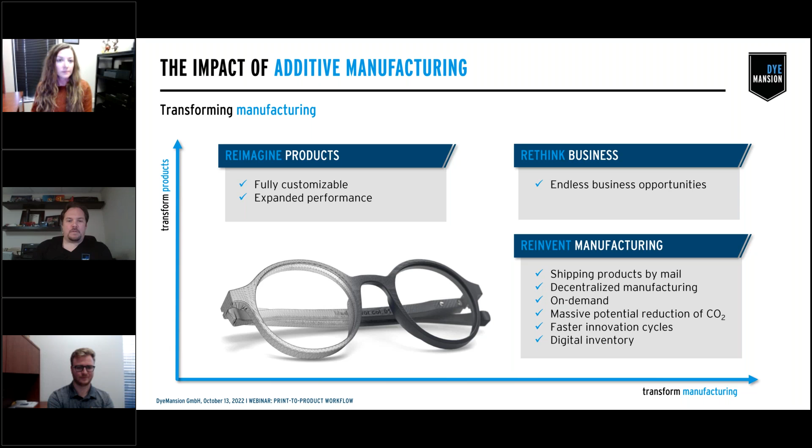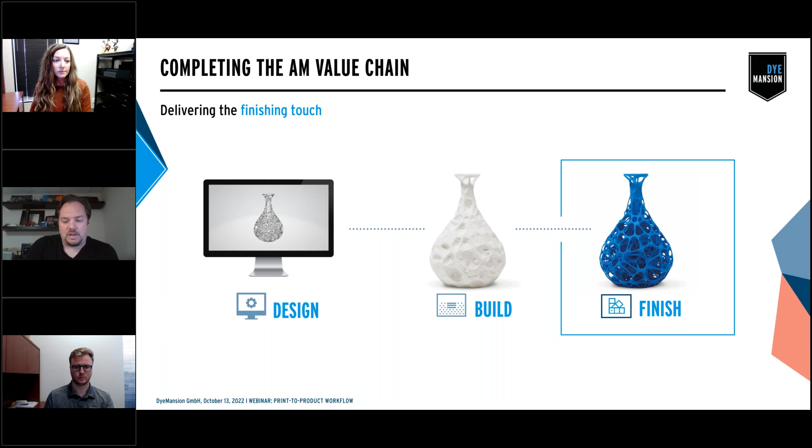The rest of this presentation will look as follows. I'll go into some details as to who we are at DyeMansion, the print-to-product workflow platform, as we call it, and I'll take a deep dive into our technology segments as well.

At DyeMansion, it's our mission to continue to be the global leader in post-processing solutions for polymer 3D printing by turning raw parts into high-value products.

DyeMansion was founded in 2015, headquartered in Munich, Germany. Our North American team operates out of Austin, Texas, and globally to date, we're right around 100 or so people, and we have about 700 systems or more installed worldwide.

It's our vision to make 3D printed products part of our everyday lives, enabling tailored solutions and driving towards sustainable manufacturing. This is all achieved primarily with the people in our company and the great technologies we have produced. We then fortify this with our great partner network of OEM 3D printing companies and great resellers like AdvancedTek.

As showcased here, today we are the only provider of a full workflow that offers an end-to-end solution for advanced finishing. This includes cleaning, surfacing, and coloring. Again, it's the technology and our methodology that allows us to bring high value to the raw 3D printed part.

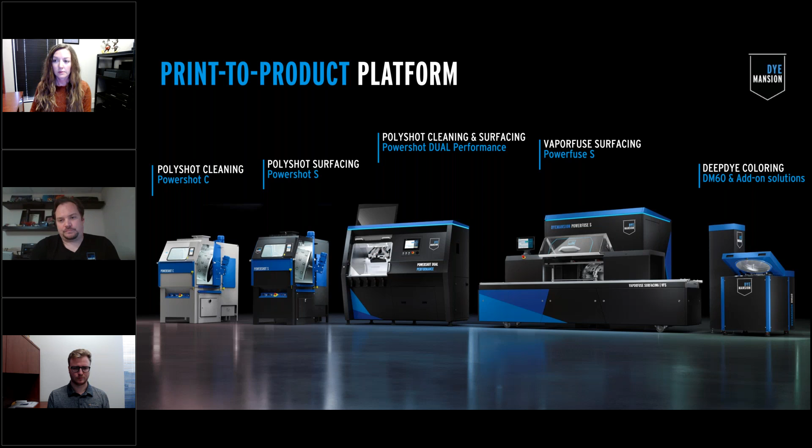When looking at the benefits of our print-to-product workflow, you'll see it delivers high-quality parts from a technology infrastructure that is not only versatile, but automated and scalable with readiness to support Industry 4.0. We've already found proven success within various industries that is largely due to our agnostic approach to materials and geometry, with a focus on building robust systems that achieve reproducible results, which further provides a cost value to our customers.

The DyeMansion technologies are quite versatile when it comes to supporting printing technologies in the wide range of materials in the market. With that, we primarily focus on the polymer powder bed technologies like SLS, MJF, and SAF, where we can process the many flavors of nylon 12, nylon 11, and TPU materials. We've been expanding our smoothing capabilities into the filament space with advanced materials like Ultem, ABS, and nylon. We even have limited dye capability with the EPU resins from Carbon.

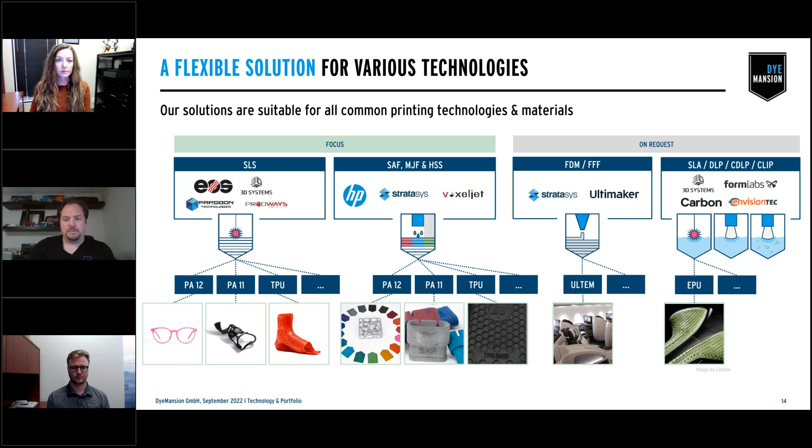What you see here is kind of how that print-to-product workflow can be applied to a printing technology segment. So again, beginning with that digital phase where they're using advanced surfacing technologies like nTopology, along with 3D designs like GrabCAD. Once you have your digital component, you send it to a printer like that of the Stratasys H350, their new SAF technology. Once the parts have completed building, you'll do a light decaking or depowdering of the part.

So you're just getting that bulk material off, and then you'll put that part with still powder on it inside of our PolyShot Cleaning system, also known as the PSC. From there, it'll run an automated process of about 10 minutes where the parts are tumbled in a rotating basket or drum, and a cycle of compressed air and blasting media is applied to the parts.

Once it's done, it's what we call a clean, raw, as-printed part. From there, depending on what kind of surface finish you're looking for, if you're looking for something closer to the raw part where it's still granular, and not a completely smooth or high gloss part, you'll want to take this top line where you'll actually apply color first, and then you'll run it through our PowerShot S Surfacing system, which uses a different media than we offer in our cleaning system, and provides a more homogeneous surface finish that locks in the color and has this satin type sheen to the final surface.

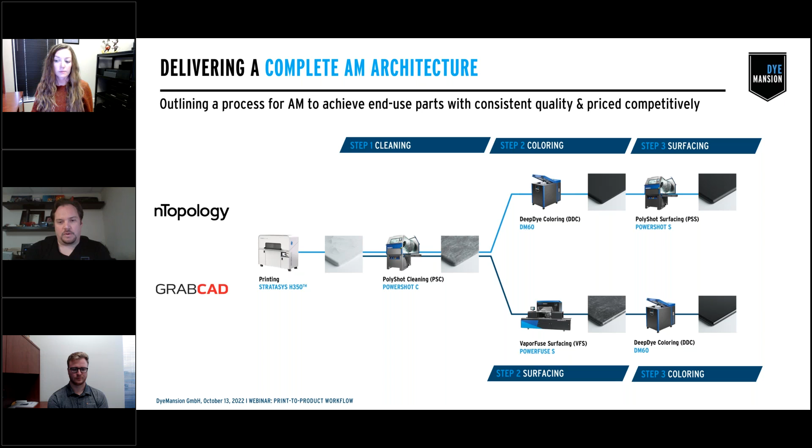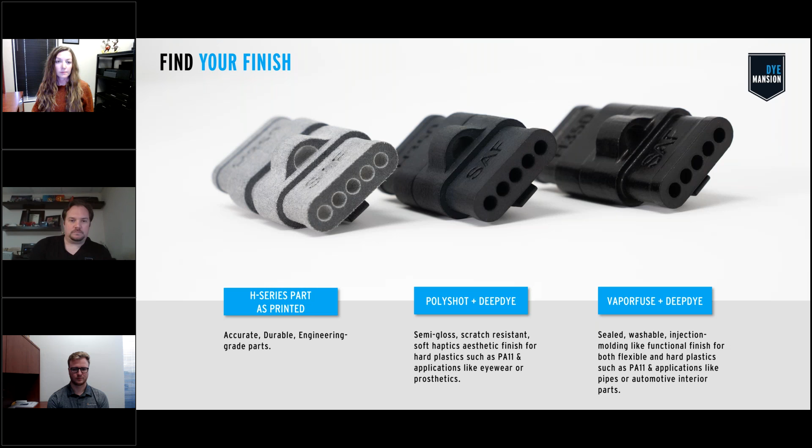So let's take a deeper dive into our actual technology systems, and we'll begin with the PolyShot cleaning, PowerShot C.

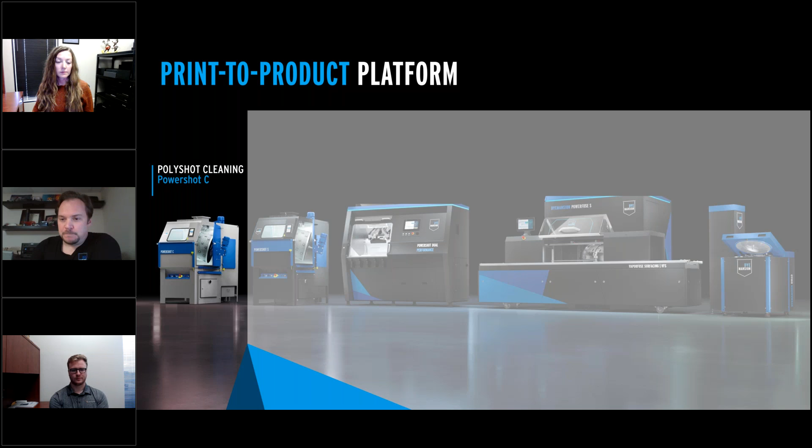The first thing to consider here are the risks of what we call manual cleaning. These are your standard bead blasting cabinets, very low cost. They're often the standard issue that a 3D printing supplier will provide. They work, but they have many flaws. Largely, you're dealing with parts in one hand and a compressor blasting gun in the other.

What we find are typically these issues: fingerprinting, just from holding the parts and not having consistent pressure, so you get this little shadowing effect. Powder residues, possibly from insufficient maintenance on the machine, to where the media is just not being as effective as it can be. And then we see these burn marks, from overpressurization or over-cleaning of the part.

On raw parts, sometimes they're hard to see, but when we look at the steps down the line with post-processing, particularly dyeing, these shadowing effects, or poor cleaning results, will show through as defects down the line, particularly in systems like dyeing.

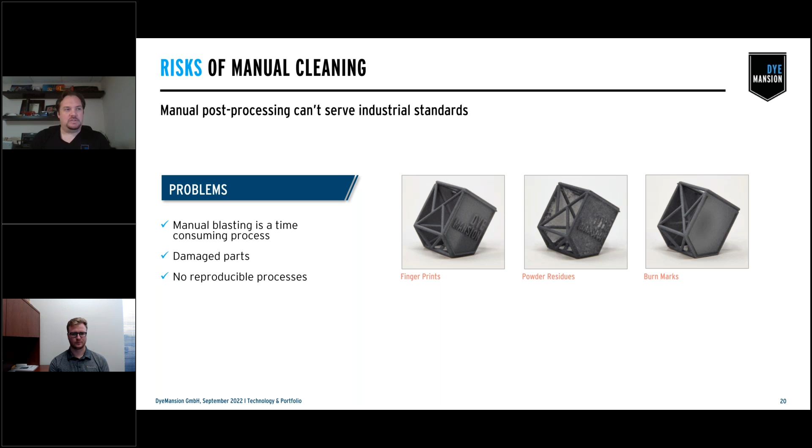So our solution is the PowerShot C. It's becoming the industry standard for easy and efficient part cleaning. It's an automated process. Once you load the parts, you close the door, select your cleaning program, which can be anywhere from 3 minutes to 10 minutes typical, but you can also create custom programs up to 15 and 20 minutes.

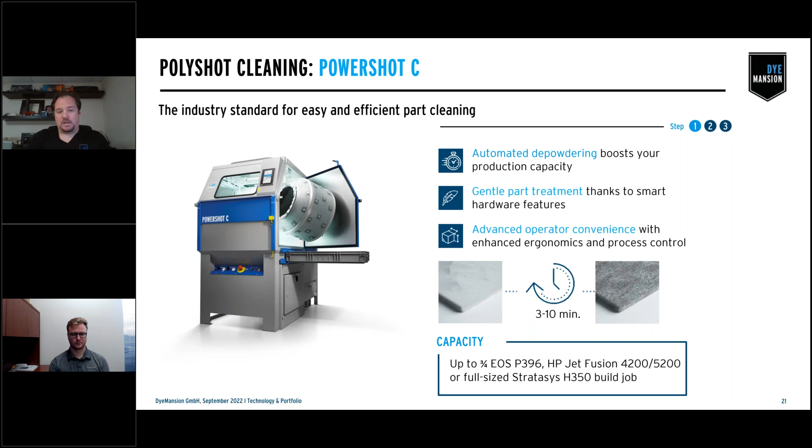It's going to run back and forth between media being blasted and compressed air to always keep that part clean and allow the media to be effective on it. As you can see at the bottom, the system has the capability to support a typical build size, about three-quarters of a full build from a P396 system or an HP 5200 system, or it can take a full-sized H350 build volume.

A little bit more of a rendering of what's going on inside the system here. You see we start with a part lightly covered in powder, and then the media is applied, breaking it down. On a microscopic level, just like with a standard cleaning process, you're still left with what we call a microfilm of partially sintered powder.

This is really where the moisture absorption and dirt and dust collection happens on an as-printed clean part. This microfilm of powder is easily impressionable and is just there to absorb anything that comes in contact with it. And then you're left with what everyone interprets as a raw printed part.

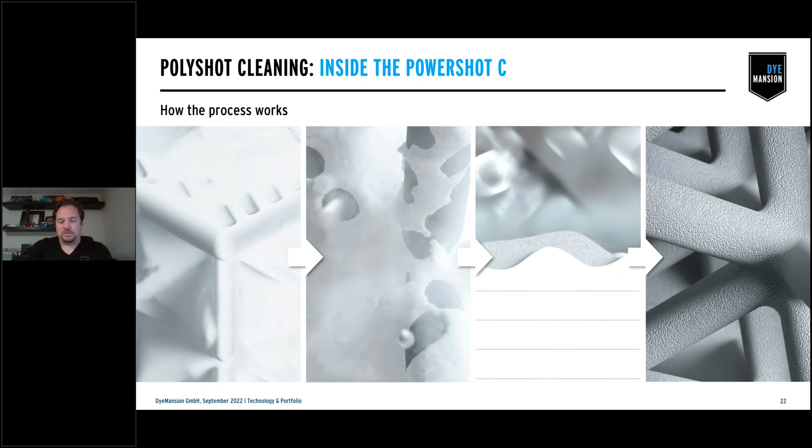Looking at the value and space savings that the system has, one PowerShot system can replace the need of 4 manual systems. It will also support typically about 3 to 4 printing systems as well. Generally, you just need one operator to maintain and support the operation of a PowerShot system.

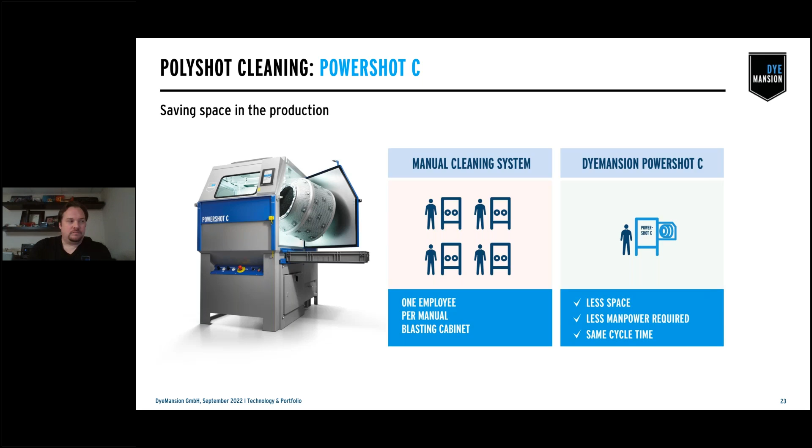Now the very similar but different PolyShot surfacing, PowerShot S platform. As you see, it's a very similar looking system, built off the PowerShot C architecture. The big difference here is the media and blasting strategies that we apply. We use a different media in terms of the actual material, as well as particle size. But it offers all the same advantages in terms of automated operation, defined programs from 5 to 15 minutes, as well as the ability to create custom programs, and it has the same capacity capabilities as the PowerShot C.

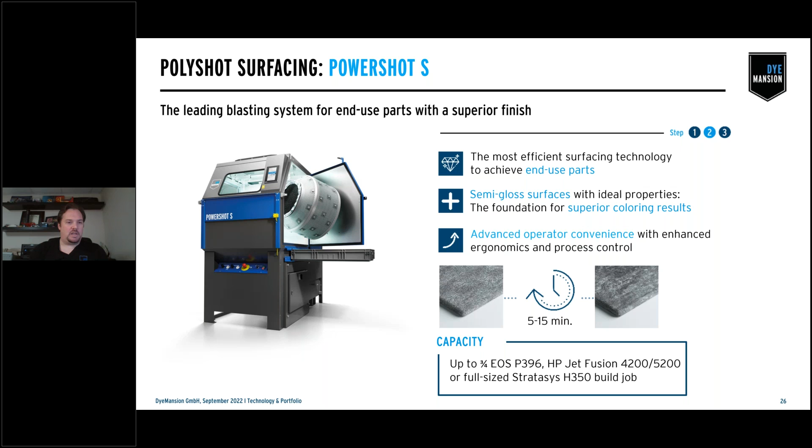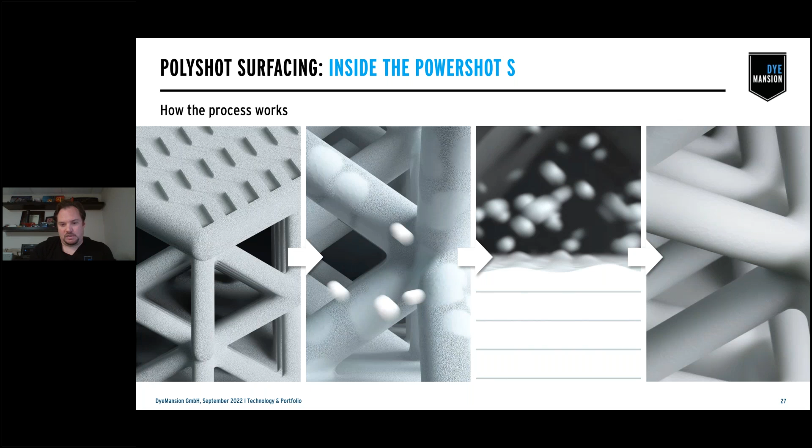So what this is really doing is once your parts have been cleaned, and run through a system like the PowerShot C, you see with that microscopic layer view that the microfilm of powder has been removed and or compacted further into the surface. So you get a cleaner, more scratch resistant, and even partially sealed surface finish that's more homogeneous and aesthetically pleasing to the human eye.

Looking at different stages and materials, with a white base material you go from the high granularity of the raw part to slightly smoother with the PolyShot S, and then the shine and finish really comes through once color has been applied. Same thing on the bottom with gray parts - you'll see the part get a little darker after the PowerShot S phase, because it's taking away that raw white material on the surface.

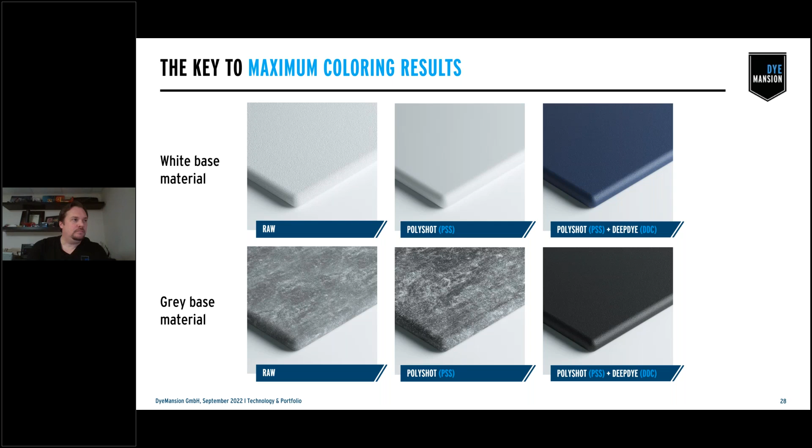These are some application highlights worth noting - automotive, consumer parts, industrial components, consumer products, and prosthetics. All of these had digital surfacing applied, nice pop colors, custom colors for flesh tone matching. You can see that all these products, while 3D printed, very much look like the industrial injection molded components they'd be mimicking otherwise.

This is what makes it the leading blasting system for end-use parts to achieve a superior finish. It's one of the most cost-effective solutions to achieving a high-performance finish as well. So this is just further examples of that capability.

Further in the PowerShot series of machines, we have our new line brought to market this year, with machines starting to deliver in this Q4 segment - this new performance series. It's available as an independent cleaning system and an independent surfacing system, but we now offer a new dual system that has the ability to do cleaning and surfacing in the same system.

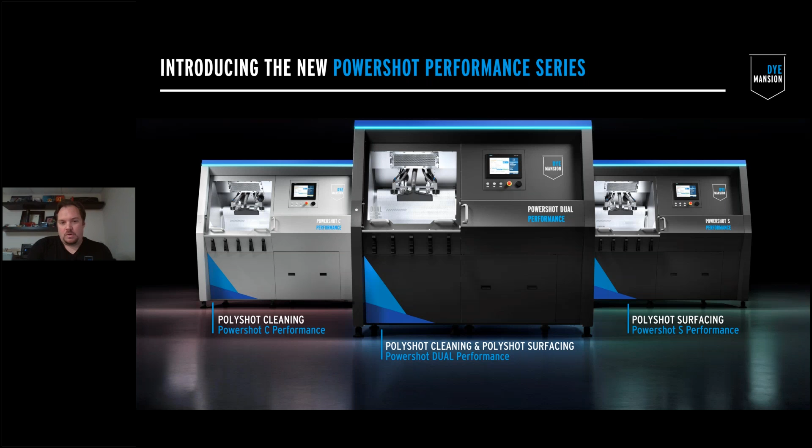One of the big process improvements to the PowerShot technology is this change to what we're calling the multi-belt. This is a much more versatile processing chamber - much larger and more accommodating to a wider range of geometry, including small parts, large parts, and fragile parts. You can see, just on size alone, how much bigger it is compared to the processing capabilities of the established printing systems I've mentioned before.

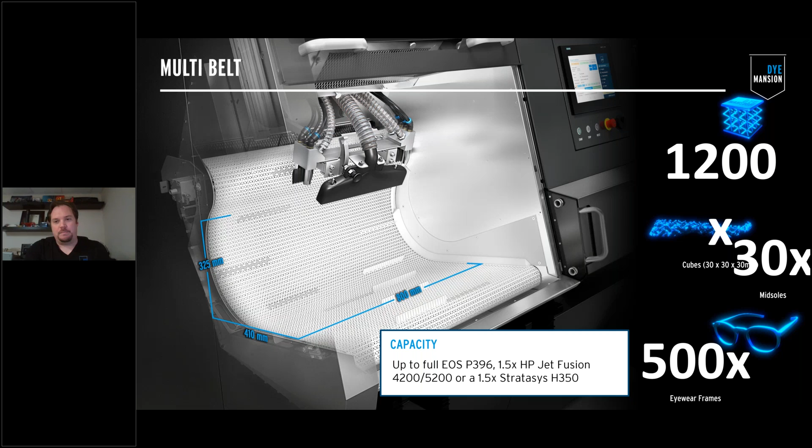Space saving wise, if you're looking at the dual performance system to replace buying two individual machines, you can see it roughly saves about 50% of the workspace compared to the footprint required for a PowerShot C or S system individually.

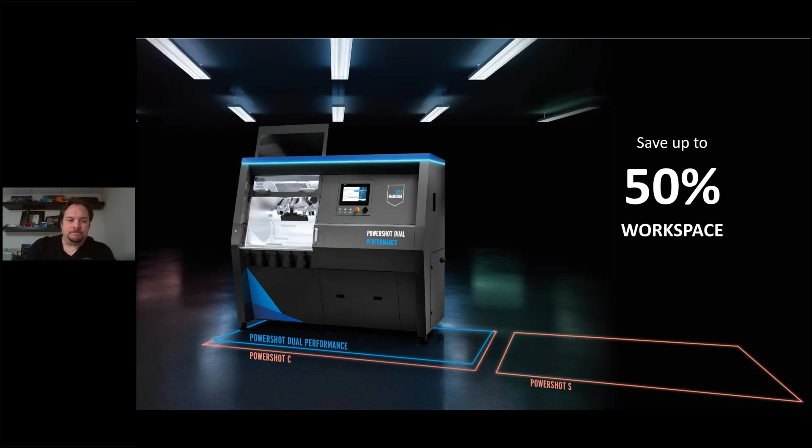Overall, this system was built further towards Industry 4.0 and the Factory of the Future. It has a similar but more advanced graphic user interface, and with the way the multi-belt functions, it can also assist in automatic unloading of processed parts.

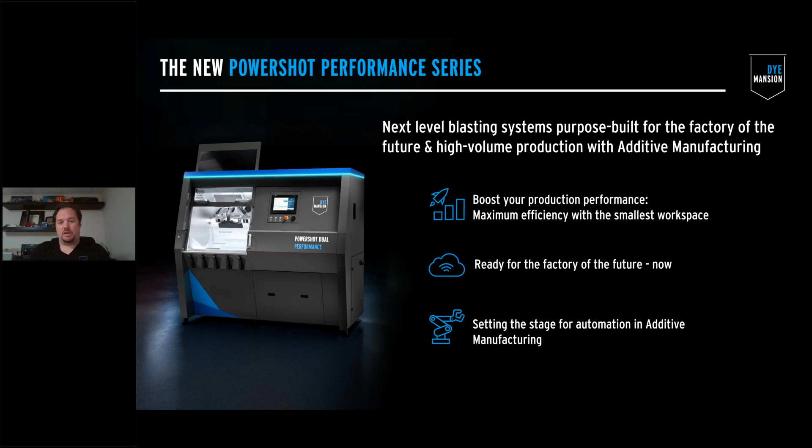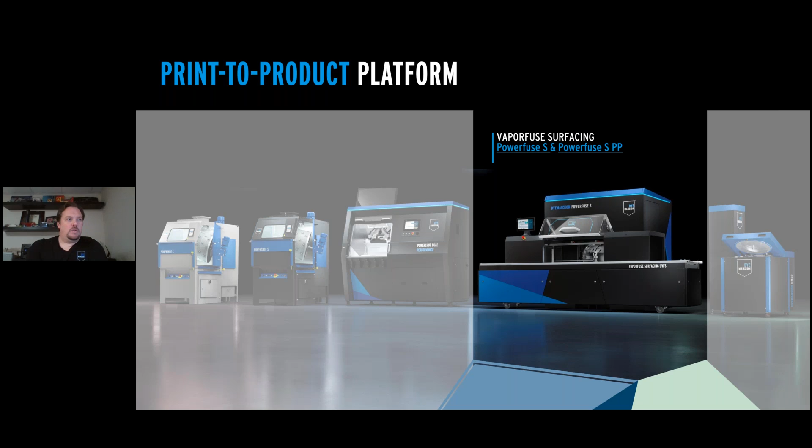Now let's look at our VaporFuse system, our smoothing technology, which we offer in two series. Newly announced last year at Formnext and coming to market through 2023 in delivery terms, we have the PowerFuse S, the system we've had available since 2019, which is our standard and most versatile system. It was developed for processing PA12s, PA11s, TPUs, and filament materials - one solvent system that treats all of these materials. Then we have the PowerFuse S PP for polypropylene, a specific system for processing polypropylene materials only. We will further develop this system to see if other material applications exist with the special solvent, but for now we're launching it as a PP exclusive system.

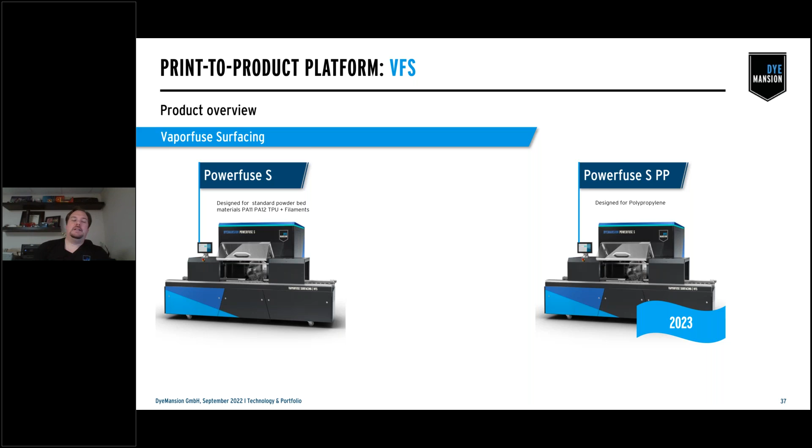The main attributes we offer with the PowerFuse S, beyond its capability, is that it's a green technology - a single solvent, and it's a green solvent as well. It's a closed loop system, so the solvent isn't a consumable that the end consumer needs to store or handle directly - easy to handle, with no concerns about needing PPE in the operation environment. Ultimately, it delivers sealed and smooth surfaces, which benefits air tightness, bacterial protection, and some part strength.

It's eco-friendly, it's a non-CMR solvent, and if you're using the right printed materials, it's approved for food contact. With the automatic loading feature, it can run 24/7, giving you automatic loading and unloading capability for lights-out operation. Typical process time is anywhere from 90 to 180 minutes, largely depending on material limits and the surfacing levels you're trying to achieve.

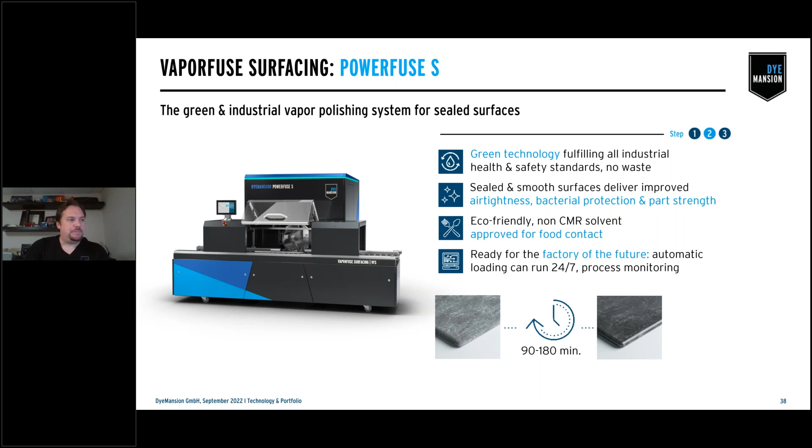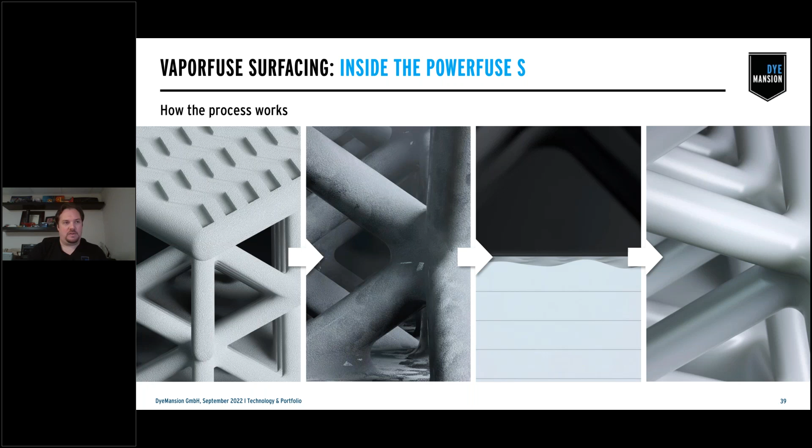Inside the system, you have your clean parts. The solvent is introduced as a vapor. It condensates and settles on the surface of the material, opens up and relaxes the material surface, and as it finishes processing, you're left with a nice, smooth, sealed surface.

Another unique capability of the DyeMansion technology with the PowerFuse is our ability to have iterative smoothing levels. Out of the gate, we offer three levels of smoothing: light, balanced, and strong. These smoothing levels can be fine-tuned by the customer, so if light is too light and balanced is too strong, they can create a custom program to find that sweet spot in the middle.

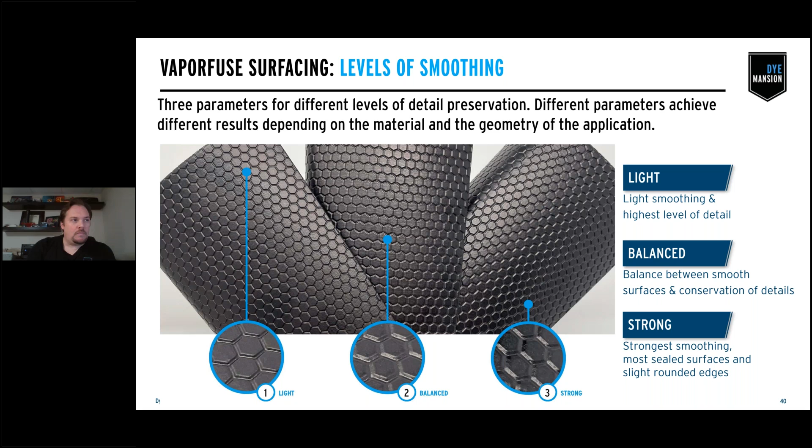Just to show you more graphically here, there is a difference between the levels we try to achieve. You can see there's a significant reduction in surface roughness going from raw to light to balanced to strong.

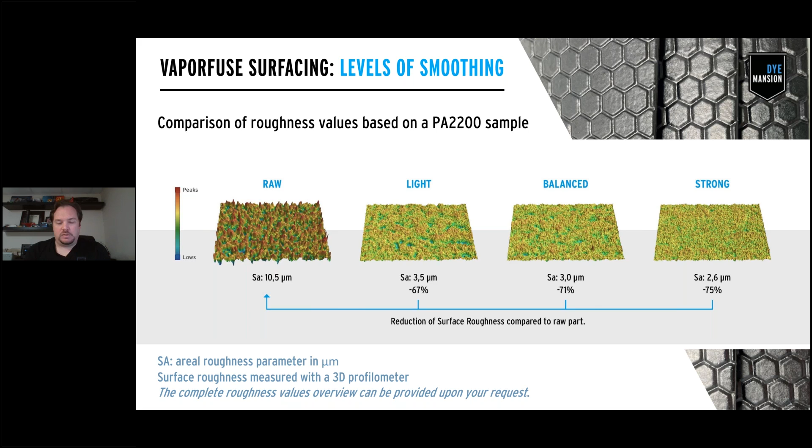TPU materials typically continue to de-powder after they've been printed, so smoothing TPU materials is a great way to maintain their mechanical characteristics as well as improve their tear strength.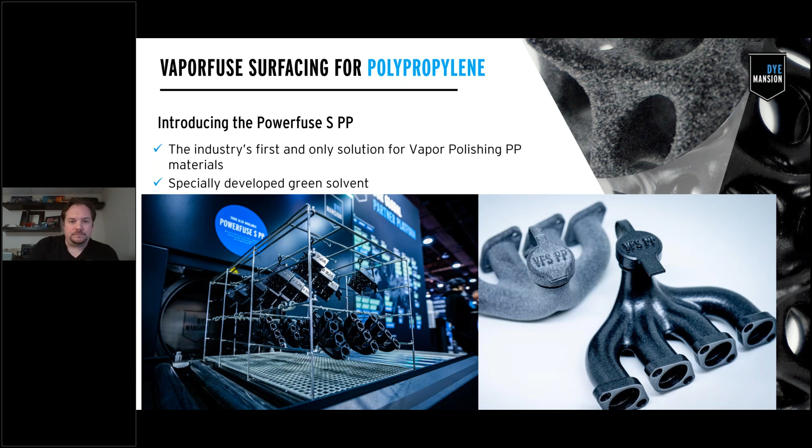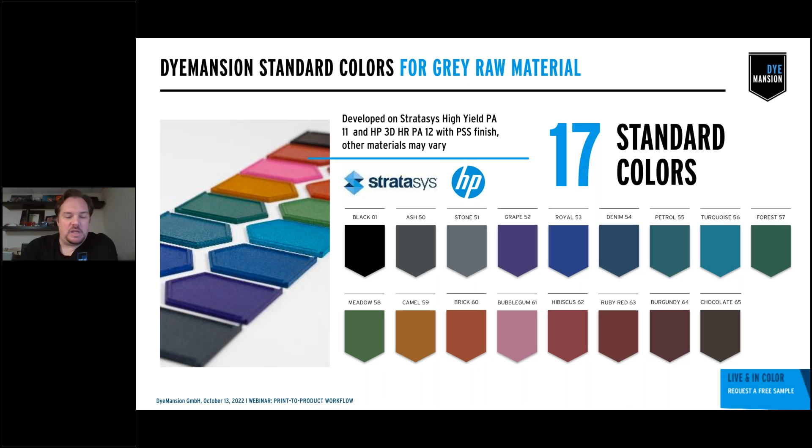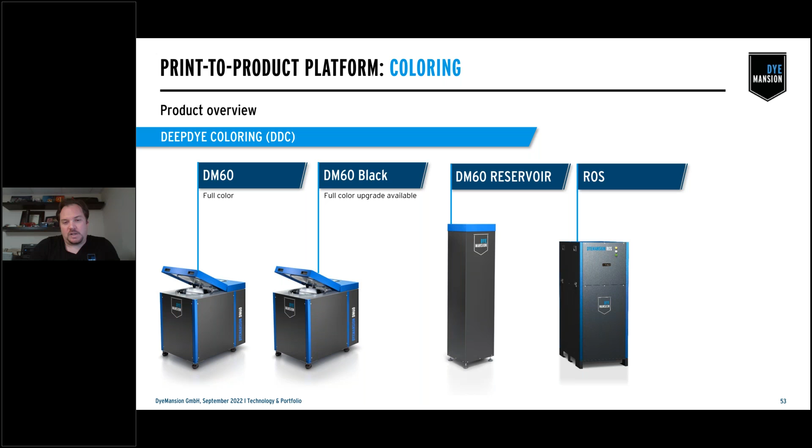So the DM60 offers this wide range of color options across all of our material capabilities, from white-based parts to gray-based parts, as well as PA12, PA11, and TPU materials. These are exact formulas that we produce, meaning they're reproducible and offer traceability for the process—important if you're implementing multiple machines across multiple factories. Our colors and their production are all ISO certified. Typical runtime is about 2.5 hours, and much like the PowerShot, we can support about three-quarters of a build volume for the EOS P396, or up to a full-size build volume for the H350 from Stratasys.

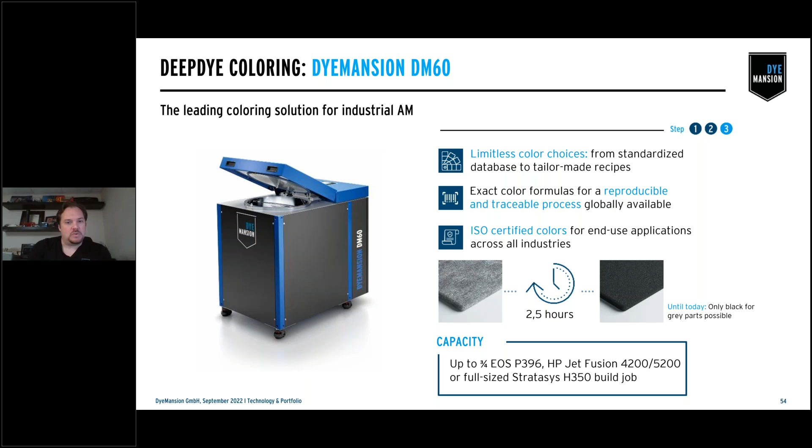Inside the system, parts are introduced to a water bath where the dye is mixed, chemically bonding to the material. You can see this penetrative effect, depending on material thickness, chemistry, and process time. You'll see anywhere from 100 to 300 microns of color penetration depth, which means it's much more scratch resistant than other coloring methods out there.

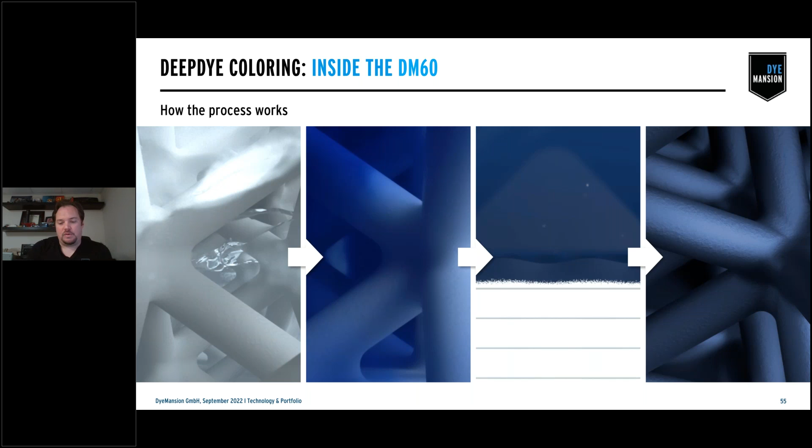Speaking of other coloring methods, we're often compared to pot dyeing technologies. So what are some advantages of our system? It's much easier to operate, as simple as loading up parts, kind of like the interaction at a self-checkout at a grocery store. You scan the cartridge, it recognizes the processing recipe, sets all the parameters, you hit the function to lock the door. Once locked, it runs an automated process that includes cleaning, which is a big advantage versus pot dyeing, where systems are very manual and often require manual cleaning maintenance, whereas ours is automatic with a cleaning agent.

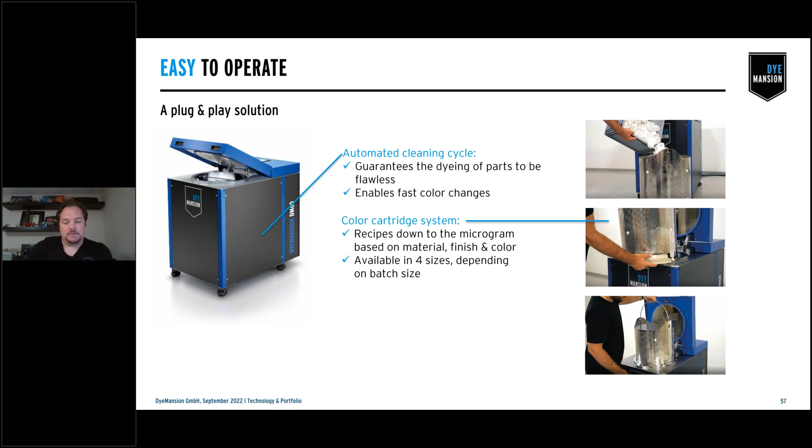More about the color and cartridge system and the reproducibility and traceability we maintain. Each cartridge is specially developed and mixed, with an RFID tag containing part specifications factoring in geometry, build process, materials, and the finished surface you're looking to achieve—whether a PolyShot surface, a vapor smoothed surface, or tumbled from an outside provider. We take all these factors into consideration when developing colors for our customers, and that's all baked into the RFID tag, ensuring reproducible results when building at scale and volume.

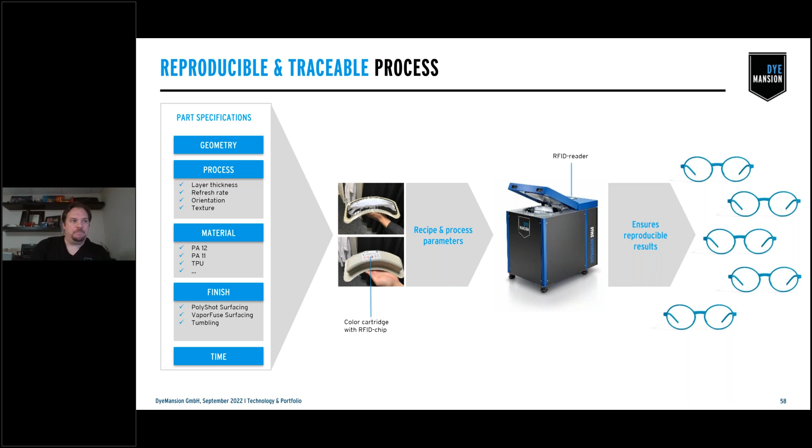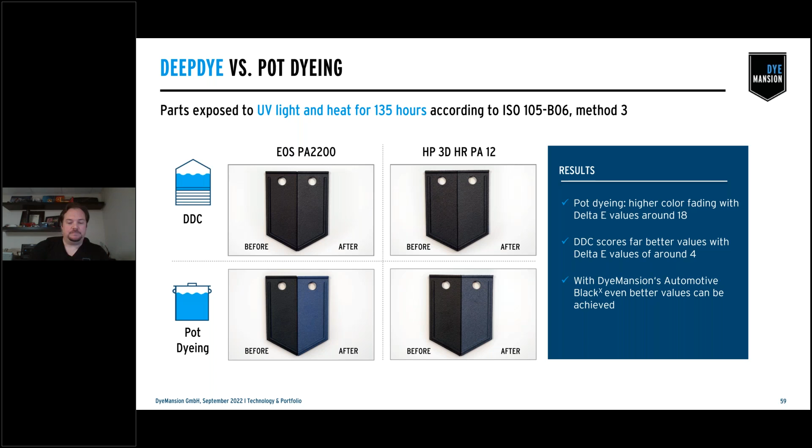A big comparative advantage is our color robustness. When exposed to UV light and temperature environments, we're able to maintain color vibrancy much better and longer than a traditional pot dye system. Unlike something from a box at a hobby or fabric store, or made for textiles, these are specially developed color formulas. Our production method is ISO certified, and we test against various ISO levels and industry standards related to biocompatibility, color fastness, scratch resistance, and light and heat resistance. All this documentation can be provided to customers upon request.

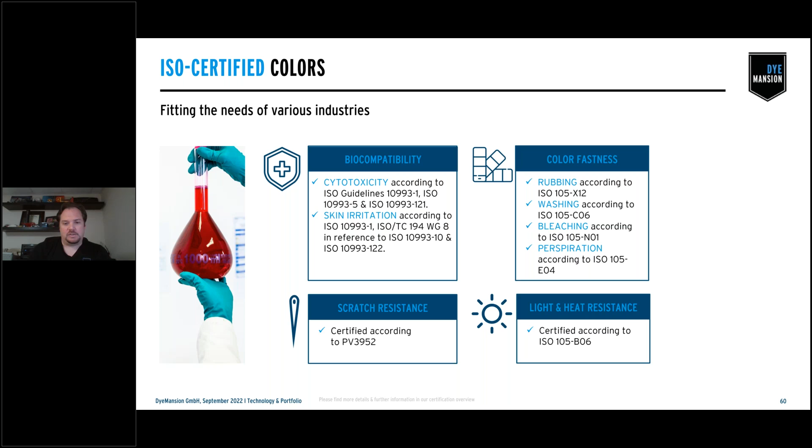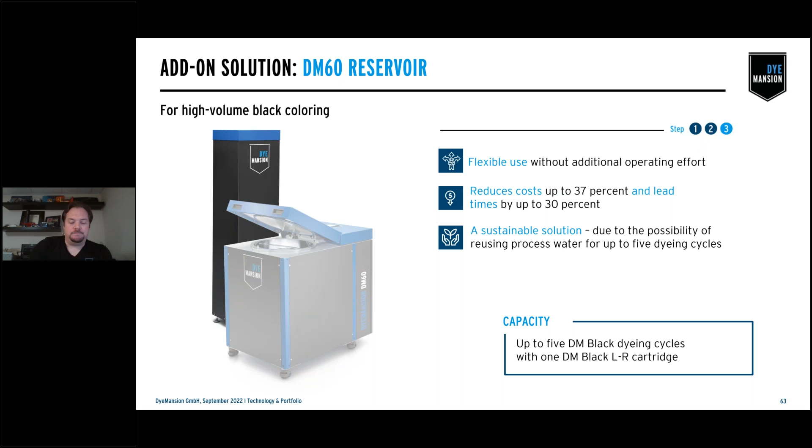That concludes our deep dive into the technology. To summarize as I close out, additional services we provide to our customers include my role—application consulting—where we do knowledge transfer and training on the technology, advanced training to further enable our customers, as well as traditional service and technology enablement, making sure to help customers with on-site and remote support to troubleshoot any issues they may be having.

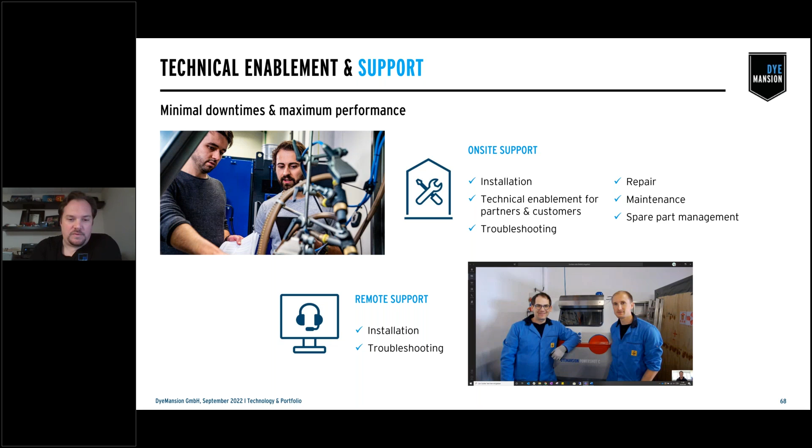So that concludes my portion of this presentation.

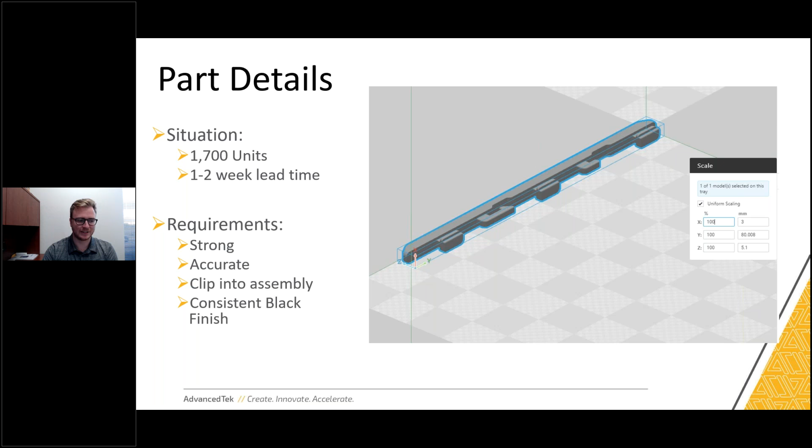We made these parts previously, but obviously we weren't going to be able to meet their requirements for timing if we stuck with FDM. It would have taken us 4 to 6 weeks, and they needed it in 1 to 2 weeks. So that was the main problem there.

If you're familiar with these short run types of parts, the lead time and cost to get an injection tool made is often quite high, so that's where people are typically looking to get these parts 3D printed.

Now with the new Stratasys SAF nylon 11 printer, we were able to handle this request using the DyeMansion PowerShot C and the DM60 for post-processing. So that's where the problem originated and how we were able to drive to a new solution using Stratasys and DyeMansion.

You can see here, on your right, the nesting chamber of the H350. We didn't even have to use half the build chamber to process 1,700 parts.

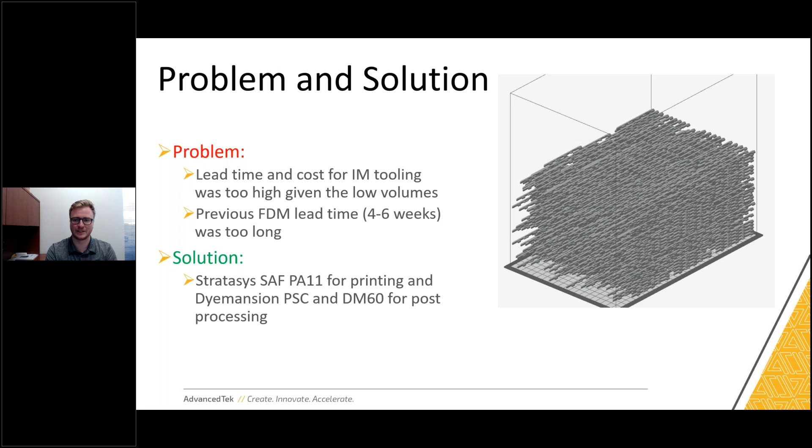So why did we pick Stratasys and DyeMansion? It's a new high volume printer with a print head, and it doesn't matter if I have one of these clips or 100 of them on a layer—my build time is purely based on the Z height of my build, so that print head passes over the same area whether I have one part or 100 parts on that layer. That's how we're able to get really high volume throughput with this new printer.

And the important part is that this printer produces really consistent results, so these little tabs and fingers came out perfect every time.

Then the PowerShot C from DyeMansion, that Lester was talking about earlier—the first product—we used that for the automated residual powder removal, because otherwise you'd be standing in a blast cabinet for probably several hours processing these parts. Then the DM60 from DyeMansion was used as a final step to dye the parts and give them a consistent, uniform finish.

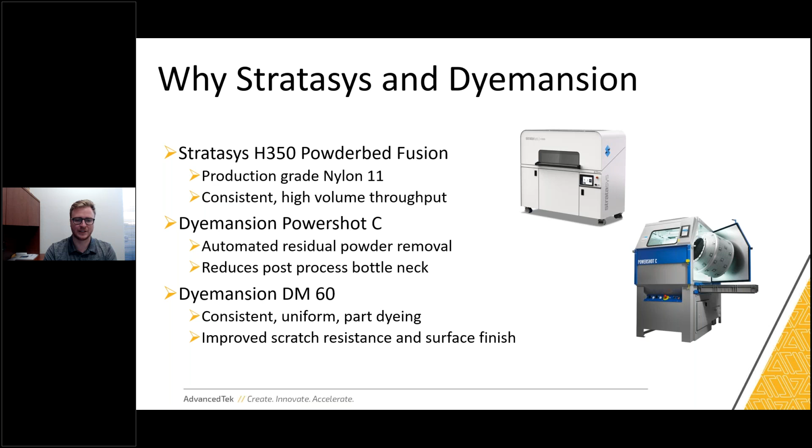So this is just an overview of the workflow: it was an 8-hour print with a 16-hour cooling period, so literally one day before we could get to our parts, which was incredibly fast. Then we did the bulk powder removal.

For those who have never done bulk powder removal, the powder comes out in almost a cake form, like a fossil dig. You remove the bulk powder from it, and then the residual fine layer powder removal is done with the blasting process—the PowerShot C makes that very seamless and hands-off.

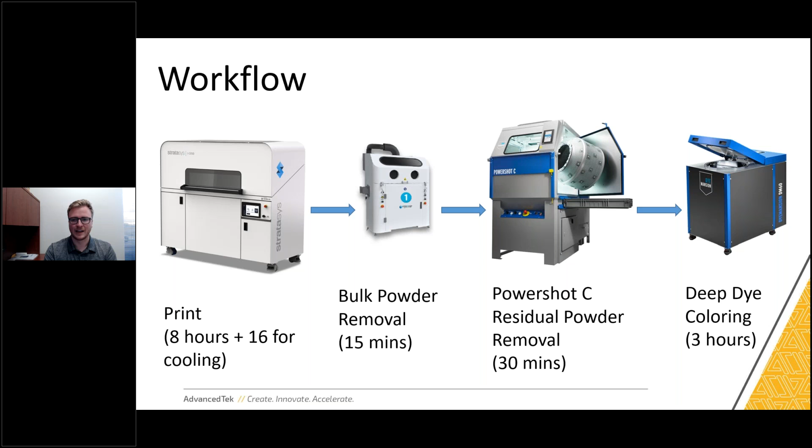So I have some close-up pictures here—you can see the residual powder, that white film after the bulk depowdering.

You can just imagine having to bead blast one of those off - for 1,700 of them it would take quite a bit of technician time. Simply by loading them into the PowerShot C, we were able to achieve a nice clean finish. Those are the parts in the middle there.

And then finally on the right, we have the parts dyed black.

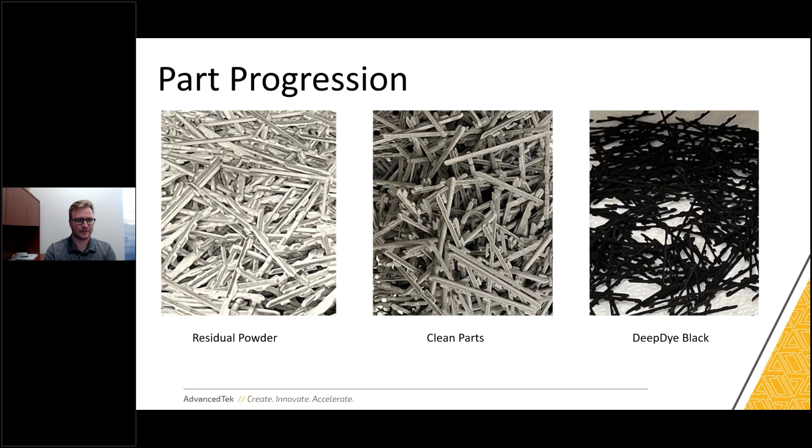So really the value proposition came from two different places. One, on the printing side, we were able to produce a high quality small part in a much higher volume than what we were previously able to do. And that's not a knock on FDM either - we use FDM for bigger parts, and if you need one or two parts, it's very effective.

But we're finding if you want to do volume production of high quality small parts, this new Stratasys H350 works wonders for that. We were able to reduce the build time from almost a month down to 1 day, and not even using half the build chamber, which is just wild to me.

And then the DyeMansion on the post-processing side - there's a good chance people would look the other way, or just bite the bullet and have their operators work overtime to process a job of this size and magnitude in the time that they needed it. We estimated it would take over 6 hours, nearly a full day of work to process this job if we were to do it manually.

Instead, it literally took 30 minutes, most of which was just watching the PowerShot C do its thing and loading and unloading it. And then to top it off, it's a great part, but this customer - it was going to be a customer facing part, so they wanted to dye it black and color it. That gave it the boost in UV and scratch resistance as well.

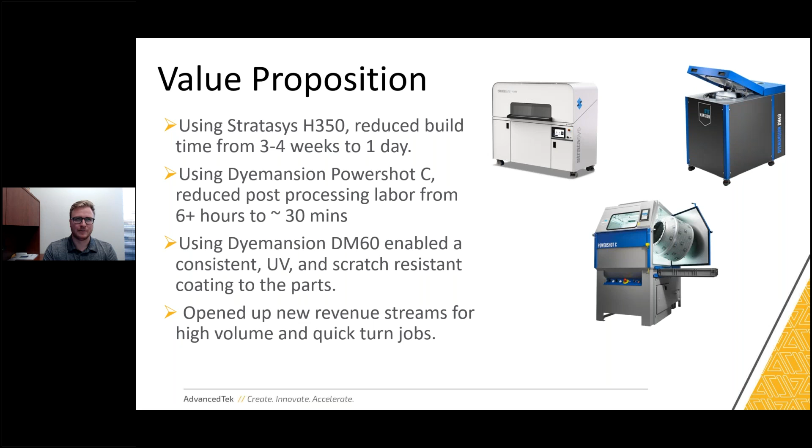So really, at the end of the day, this combination opened up a new revenue stream and new opportunities for us to do high volume work and quick turn jobs, which is what we're seeing our customers start to use this technology for in the field - to produce high quality end use parts that meet several requirements in a way that reduces post processing labor as well.

So that's really all I have. I'll turn it over to Heather to moderate some questions.